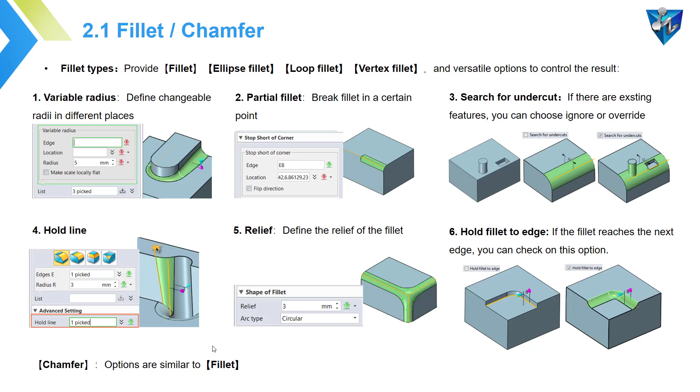Now let's move over to ZW3D to show you more details.

Now I will use this case to show you how to create a fillet. First, we click fillet, and here you can see ZW3D provides 4 basic fillet types. The first one is simple to understand, just a fillet, a cylinder fillet.

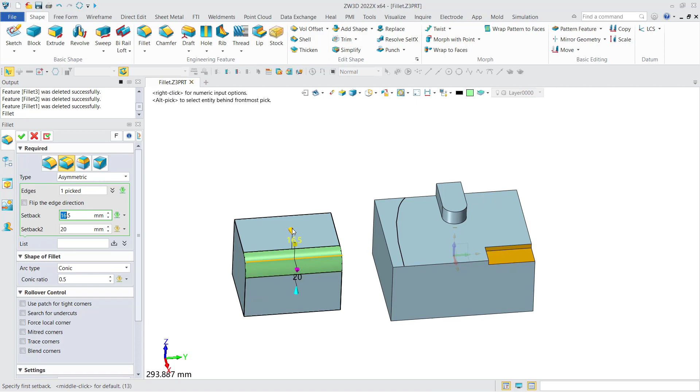The second one is ellipse fillet. Here you can make an elliptical fillet by defining the radius and also the angle, and you can also define an asymmetrical fillet, like a bigger radius here and a smaller fillet here, something like that.

The third one is about a loop fillet, which means you can select a face to define its fillet.

And the last one is about a vertex fillet, which means you can create a fillet feature by a single vertex, something like that.

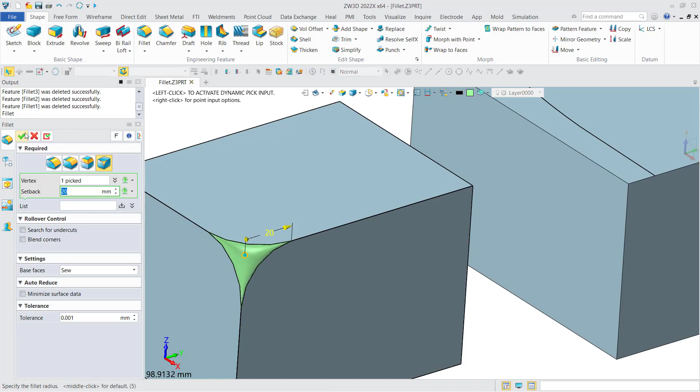So now let's see the first one, because normally we use the first one the most, right? Now I'll show you more options for the fillet.

The first option I would like to show you is the multi-edge fillet, which means you can create a fillet for multiple edges with different radii.

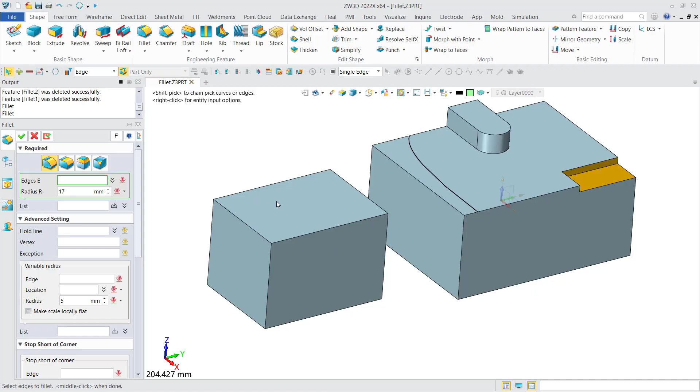I'll show you here. For these two edges, I want the fillet to be 10, and then we click this little arrow to add it to the list. And then we can continue.

We can select more edges here, like this one or this one, and then we define a smaller or bigger radius here, and then we can click OK. Now you can see we have created fillets with different radii.

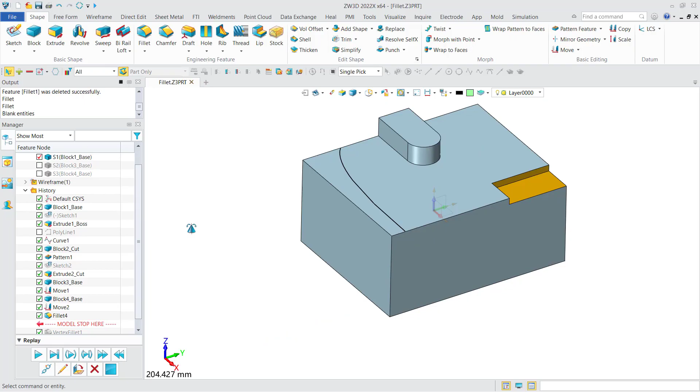Now we hide this one, and then I would like to show you more options in the fillet command.

The first one I would like to show you is the hold line here. For example, here we define an edge, and then we define the fillet radius.

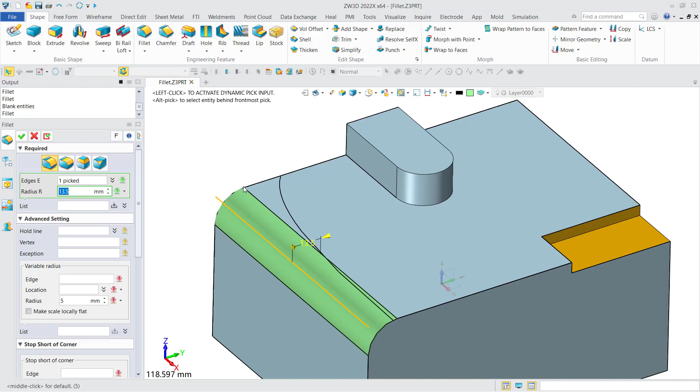Meanwhile, if we want the fillet to be controlled by this line, then we can use the hold line option. We just select the hold line, and then you can see the fillet will follow the hold line.

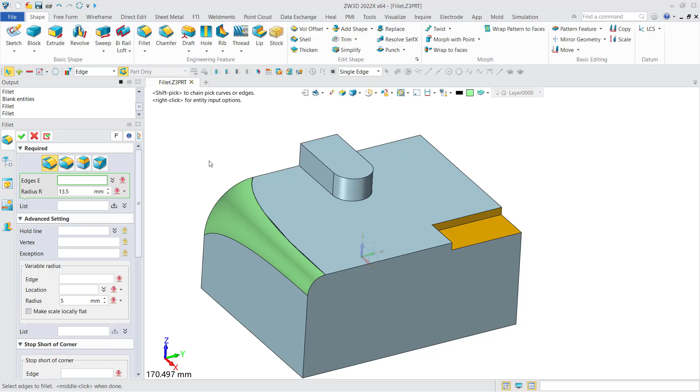Now this is the result. And the next one I would like to show you is about the variable radius fillet, like here.

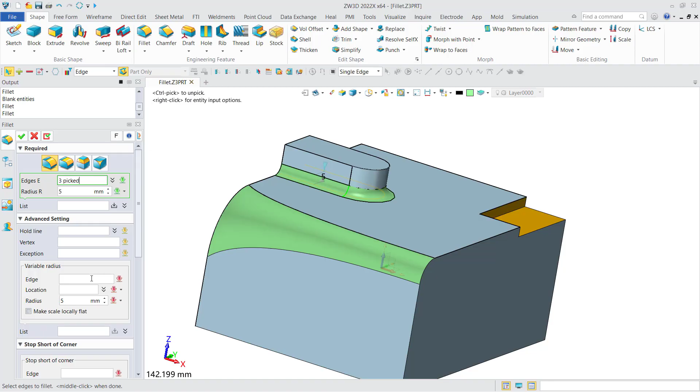Here we would like to add fillet for the 3 edges. But if we want the radius to be different in different positions, we can do as below. We select this edge, and we define a location here, and we define the radius.

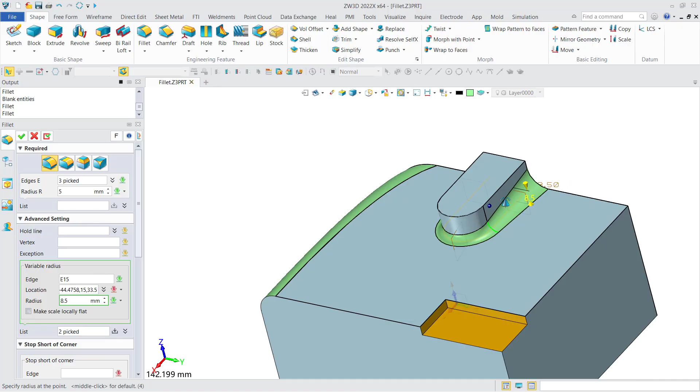Like we make it 7, and we add it to the list. And then we define the second point, and we'll make a smaller radius and add it to the list. And then we make another point, and then make it a bigger one, like 8.5, and add it to the list.

Now we click OK. Now you can see the result. It's a variable radius fillet feature.

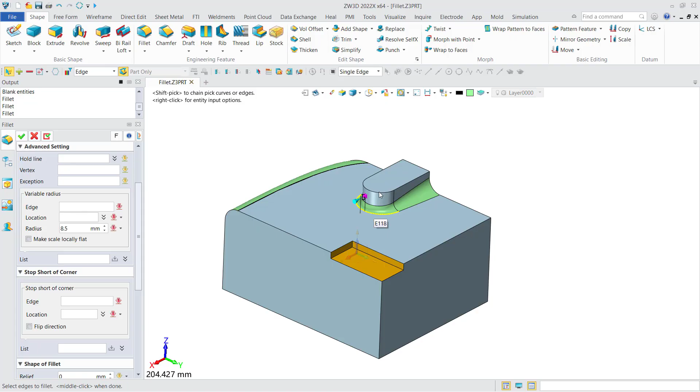And the next option I would like to show you is the partial fillet. For example, here we would like to make a fillet in this edge. Make the fillet radius as 3.

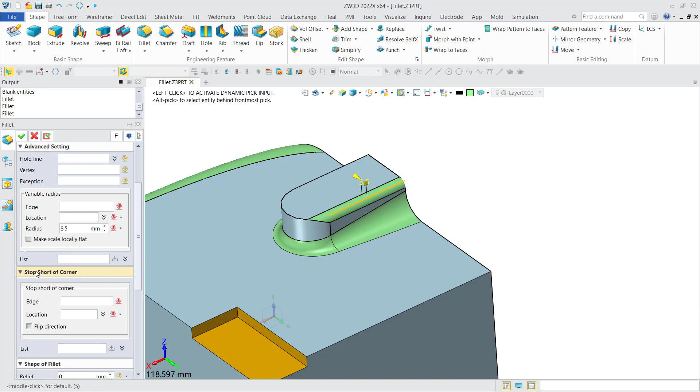And if we want to make the fillet stop at this middle point, we can use this one, stop short of corner. We define the edge and the middle point, and we can flip the direction. Here you can see the result will be partial fillet.

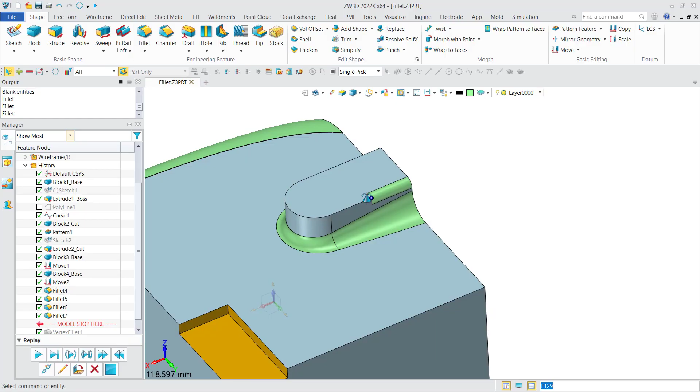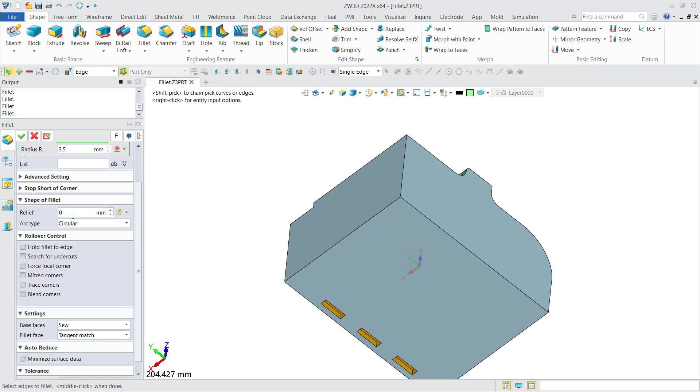And the next option I would like to show you is, we fold this one, it's the relief. We use this one to show you the relief of the fillet. For example, we would like to make a fillet for these 3 edges, like this. So by default, the result is no relief.

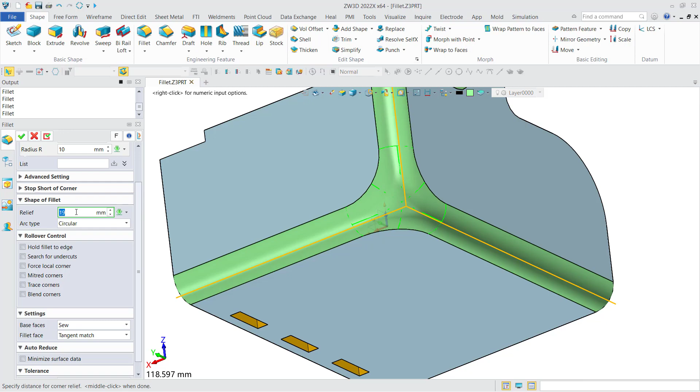So if we change the relief distance, you can see the result will change as well. Like we'll make it 10. Now you can see the result, it will be like this. This is the fillet relief.

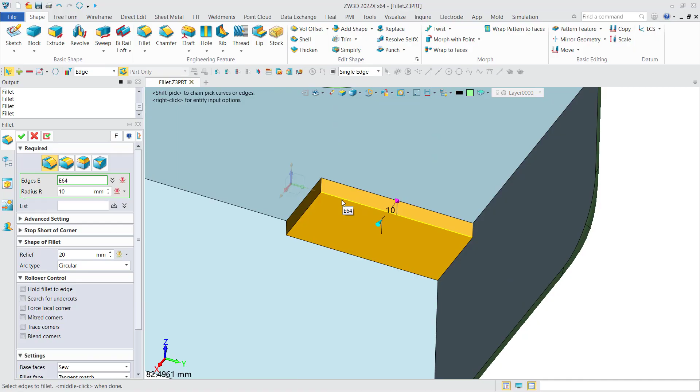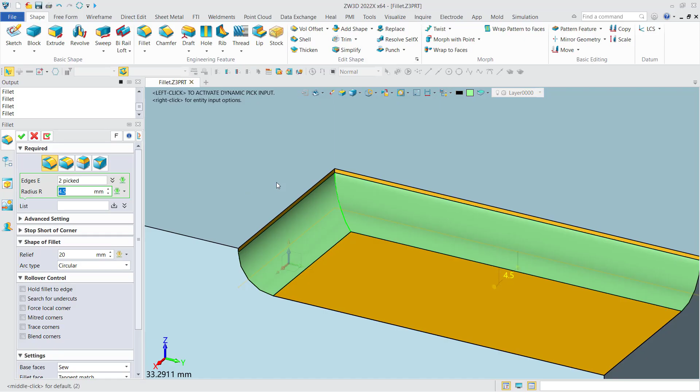And the next option I would like to show you is about the hold fillet to edge option. So in this case, we select these 2 edges, and then we make the radius bigger and bigger and bigger. And when the radius reaches the top side, you can see it will be gone, the preview will gone. And if you click OK, you can see the command will fail.

So if you want to continue to make the fillet, you need to check this option, hold fillet to edge. Then you can continue to make the radius bigger and bigger.

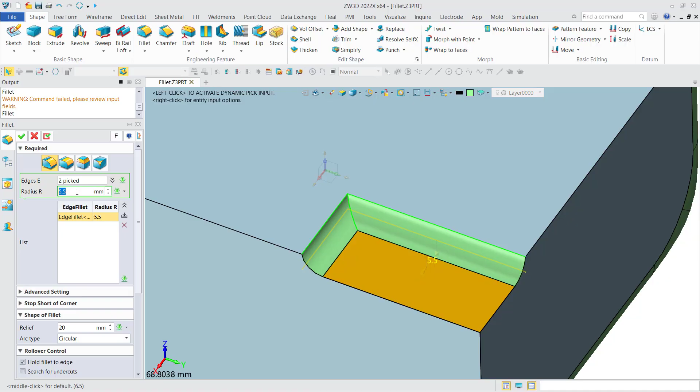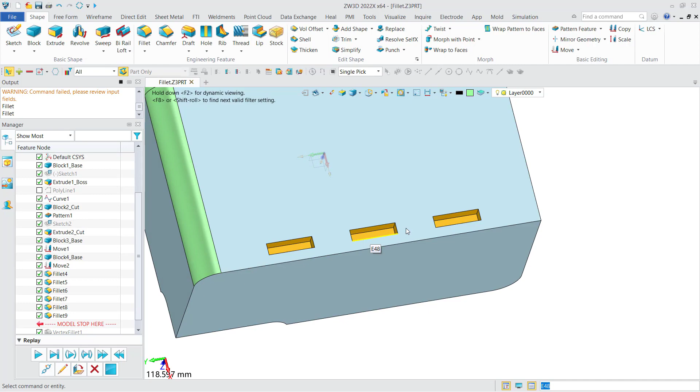And the next option I would like to show you is search for undercut. So here we can see there are already some slots here. So if we want to make a fillet in this edge, now you can see the fillet will override the existing slot features.

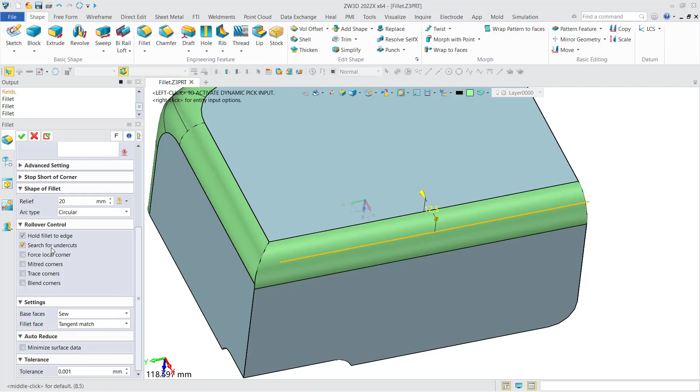So if we want to keep the slot features, we can check this option, search for undercut. Then you can see the fillet will not overwrite the existing feature. Okay, now we can click OK to see the result.

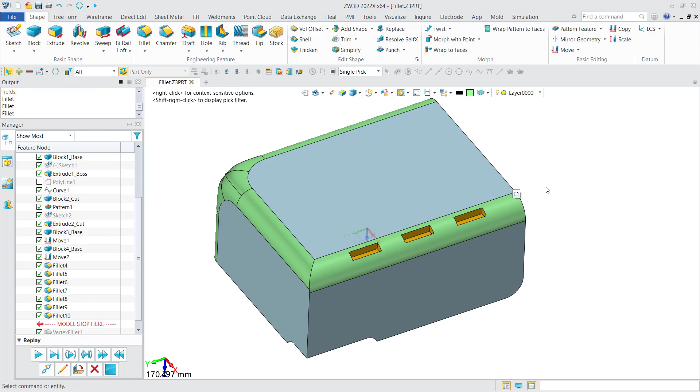Okay, this is the common used options of the fillet. And next, let's see the chamfer feature. We can make a new part and we'll make a block here, and I'll show you the chamfer feature very quickly because most of the options are similar.

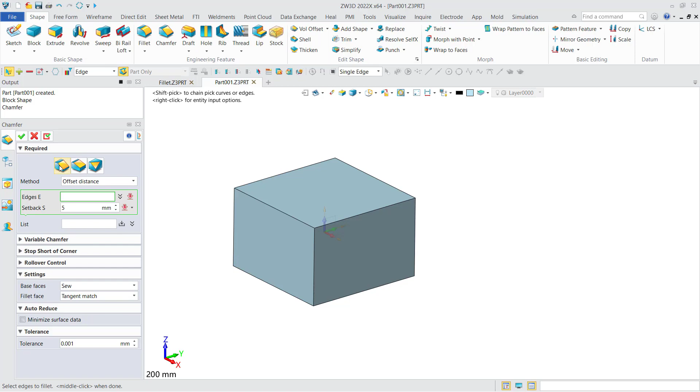Chamfer. For chamfer, we have 3 chamfer types. This one is the common chamfer, which means you can create a symmetrical chamfer feature. And there's another one, asymmetrical chamfer. Here you can make an asymmetrical chamfer by a distance and an angle.

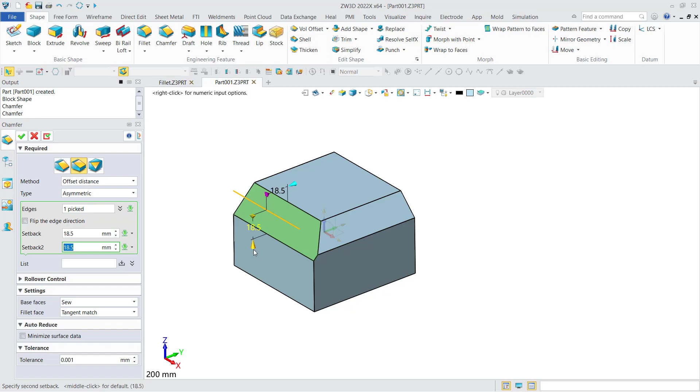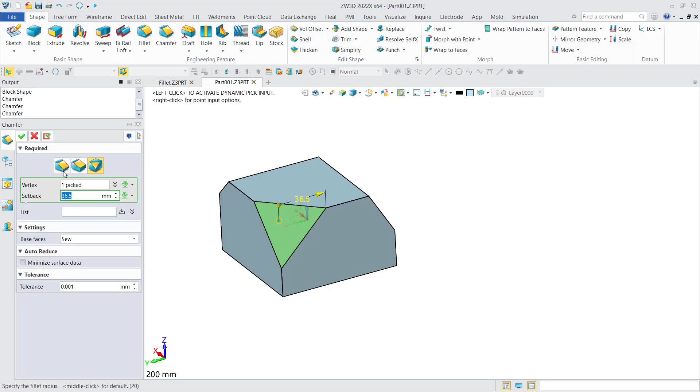And also you can make it just 2 different chamfer distances like this. Now you can see the result. And the last one is make a chamfer for the vertex, something like that. And the other options are similar to the fillet, so we will not repeatedly show you.

The next feature I would like to show you is draft. In ZW3D, we provide 3 draft methods, and with various options, you can make draft feature as needed. We have 3 basic draft methods, which is draft by edge, draft by face, and draft by parting edge. And below form, you can see the applicational cases and the differences.

Now let's see the first one, edge. So now you can see for draft by edge, the draft geometry can be edge and curve, including a parting curve. And there's no stationary.

And for the face draft, you can see the draft geometry is one face or multi faces. And there is a stationary plane or surfaces in the face draft method.

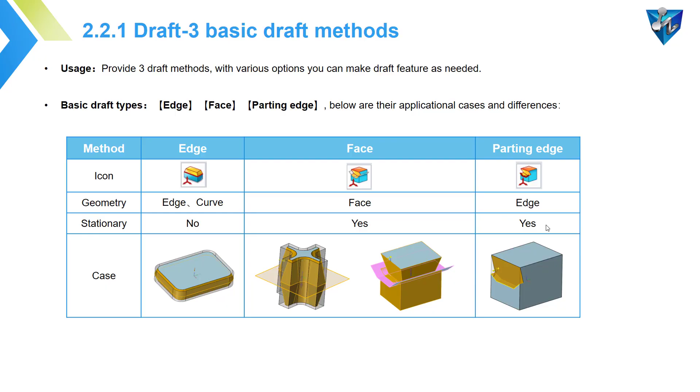And the third one is parting edge draft. And here you can see in this one the draft geometry can only be edge, and there is a stationary geometry. And there are some settings in the draft command.

The first one I would like to show you is the draft types. So first, in the edge draft, you can see we have two basic types, symmetric and asymmetric draft, which means you can draft in both sides with the same angle or different angles.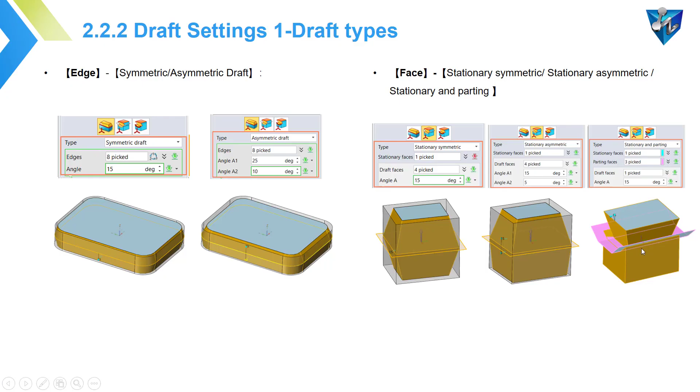And there are more draft settings. The most important one is about the draft side control. So in the edge and face draft methods, we can control the draft results by adjusting the draft side.

For example, we can make it top, which means we only draft the top side, and we will leave alone the bottom side. For the bottom side, it's on the contrary with the top side. For the split, it will draft both sides in the same direction based on the stationary edge or face. For the neutral option, it will draft both sides in opposite directions based on the stationary edge or face. Okay, now let's move over to the software to show you more details.

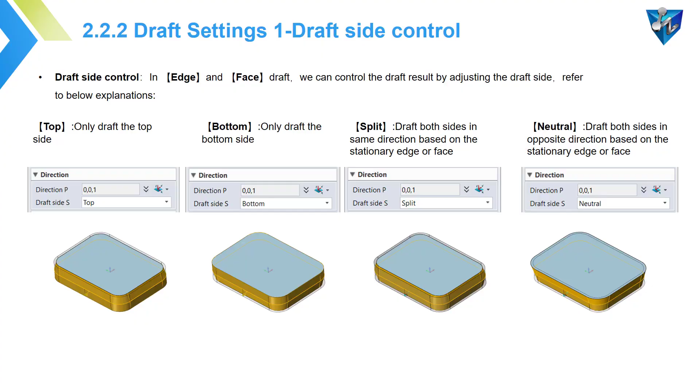Okay, now let's see the three methods one by one. First, draft by edge. Here you can see for draft by edge, we have two draft types, symmetric and asymmetric. For symmetric, it's simple to understand. We just select the edges to draft. Here we select the edge loop, and the angle we make it 15.

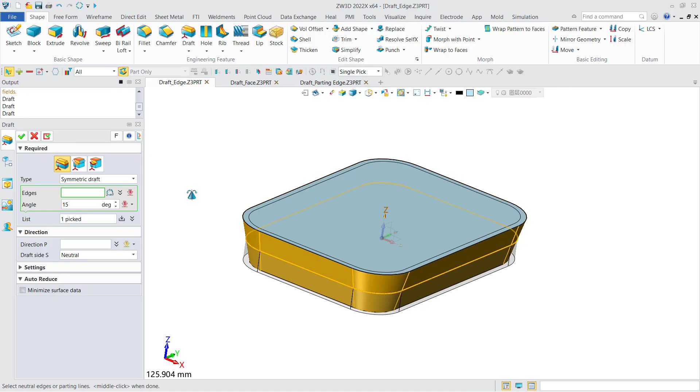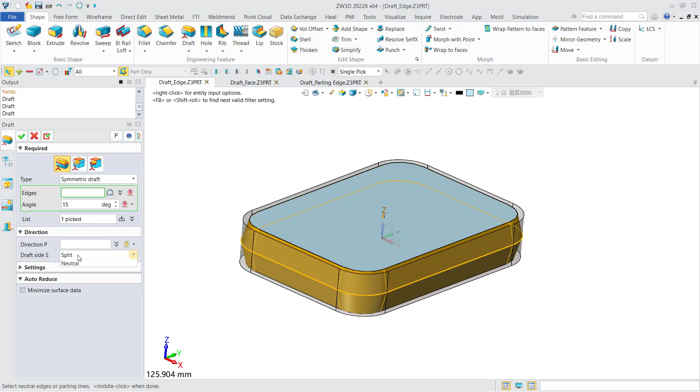So here you can see we have a draft side to control the result. For top, you can see it will only draft the top side. For bottom, it's on the contrary, only draft the bottom side. For split, it will draft both sides in the same direction. For the neutral, it will draft in different directions.

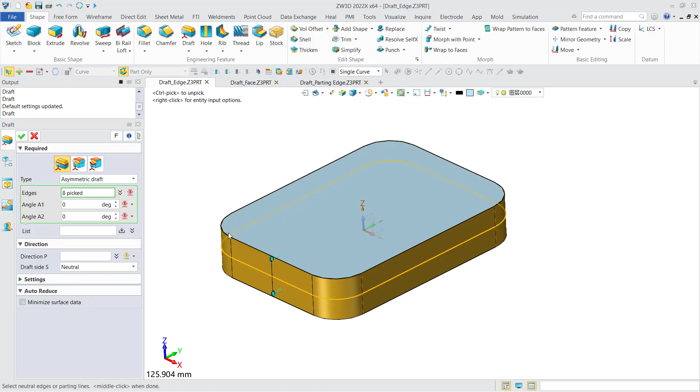This is for the symmetric draft. And for asymmetric draft, actually it's also easy to understand. You can draft both sides with different angles. Here we make it split. Here you can see we can make different angles, even different directions, to draft for both sides. Okay, this is the result.

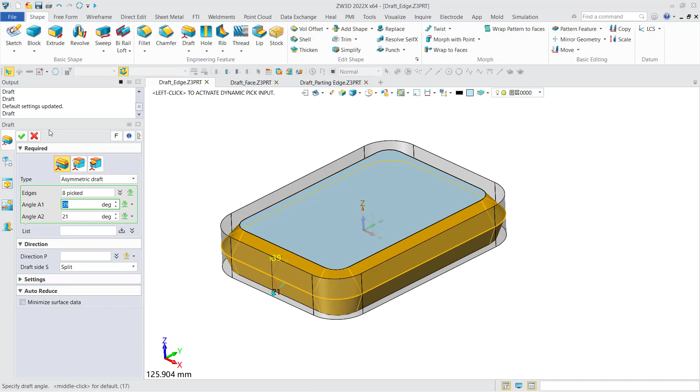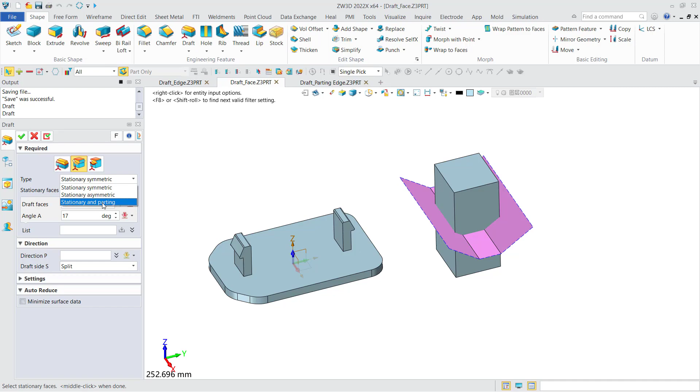And the second draft method is about draft by face. So here I will use these two cases to show you draft by face. For draft by face, there are three types: stationary symmetric, stationary asymmetric, and stationary and parting. Okay, now let's see the first one, stationary symmetric.

So first we need to define a stationary face. Here we use this one as a stationary face. Then we define the draft faces, and here you can see actually the draft faces can be different angles. Like for this face, we make the angle as 3 degrees, and then we add it to the list.

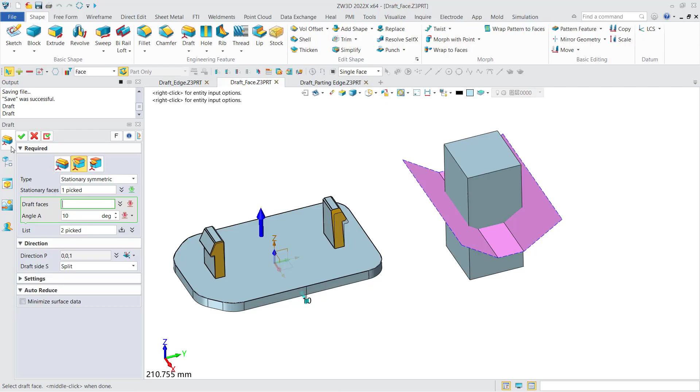And for this face, we make the angle bigger, like 10. Okay, then we add it to the list. And okay, now you can see the result, different face with different angles.

And for the second one, stationary asymmetric, I think we do not need to introduce one more time. It's similar to the edge draft.

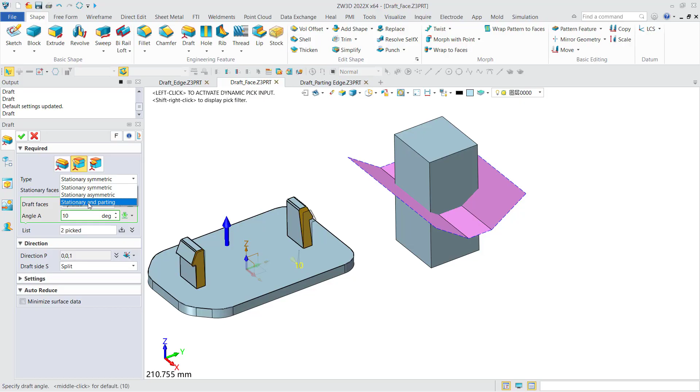Okay, here I'll show you the third draft type. It's stationary and parting, which means you need to define a stationary face and also a parting face or multiple parting faces like this. And then we select the draft face. For example, we need these two faces to be drafted, and the angle we make it like 5 degrees.

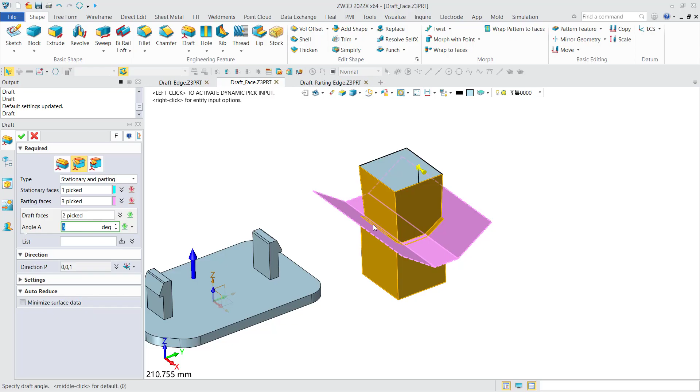Now you can see it will draft these two faces with 5 degrees and stop at these parting faces. Okay, now we can see the result. It will not draft the faces below.

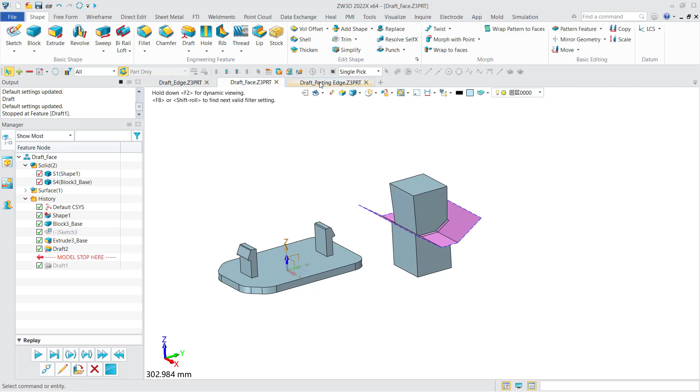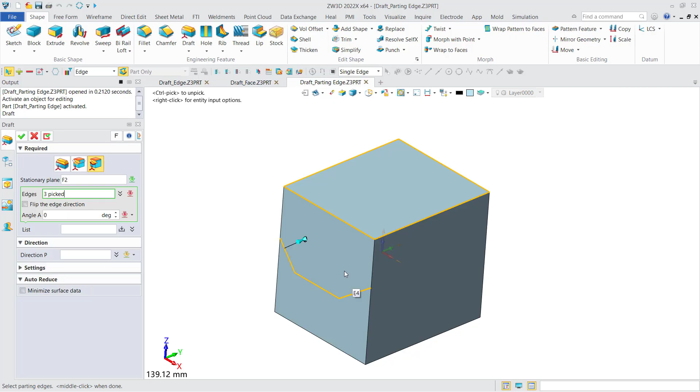Now let's see the third draft method. It's draft by parting edge. In this one, we also need a stationary plane. Like here, we use this one as the stationary plane. And then we define the parting edge, this one and this one. And then we can define the parting angle like 7 degrees. And then we can click OK to see the result. Now you can see it will be like this.

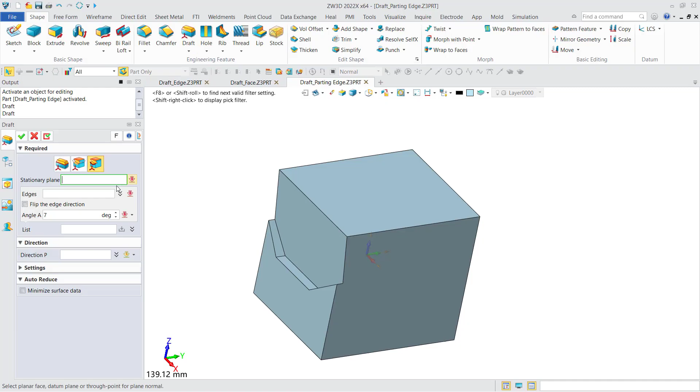So these three methods will be applied for different scenarios. You can use them accordingly.